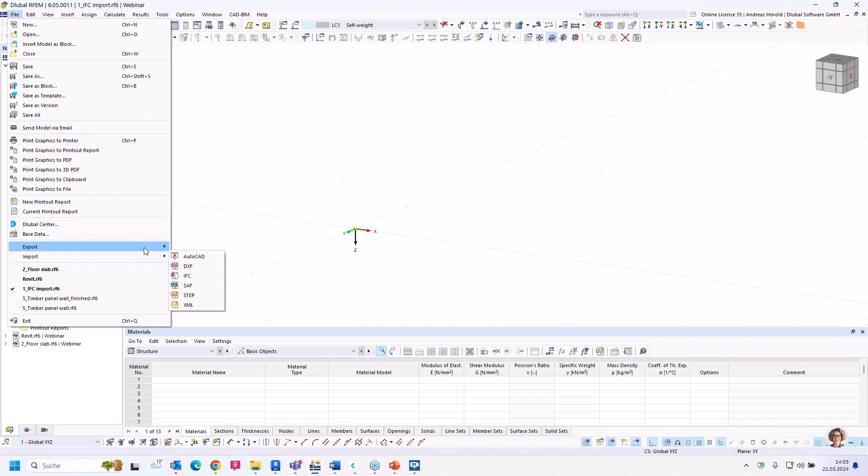You can do that via File, then Export. You can see IFC and the other interfaces, then Import, also IFC and the other interfaces. Version 4 is supported for import and export, and the older version 2x3 only works for importing. Regardless of which direction you exchange data, the structural analysis view, the reference view, and also the coordination view can be processed.

So let's import an IFC file, this file. You can choose any coordinates where you would like to import it. And then let's press OK.

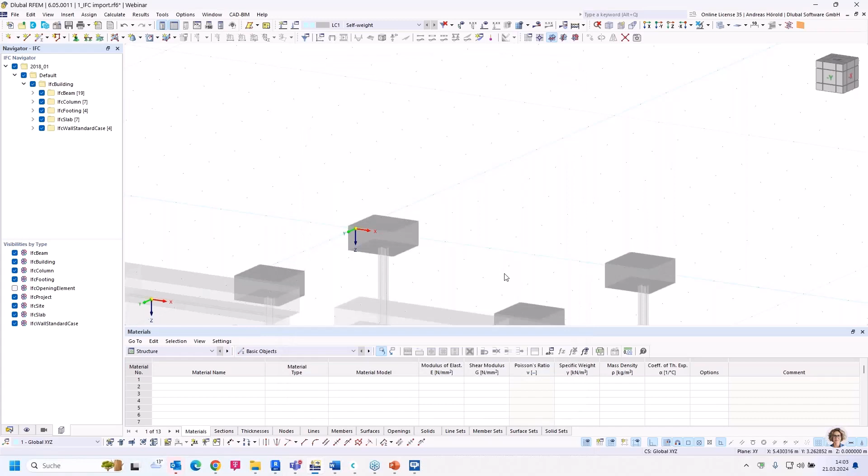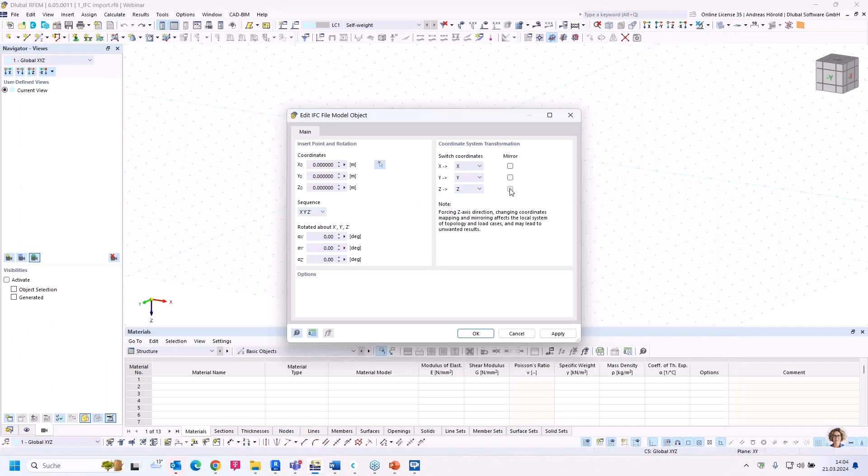You can see the import was good, but the direction of the Z-axis was opposite compared to the CAD model. That's why we do the import again: File, Import, IFC. So, and we mirror the Z-axis. Okay, that looks quite better now.

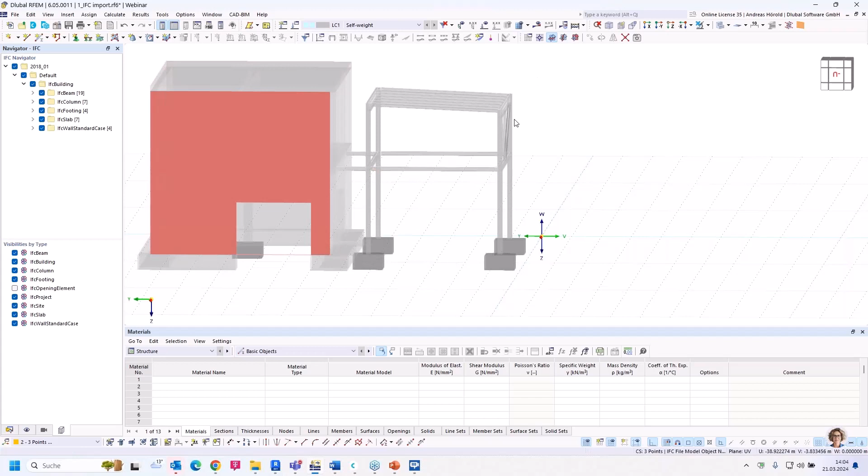Imagine we have to design the steel construction. We ignore the building here, the concrete structure, and let's prepare the model for the design. You can see at the moment it's only an IFC model object. We have to check the CAD BIM conversion tables.

The steel material has to be assigned with the material from the database in RFEM6. Also the sections, you can see the different cross sections. Most of them I already assigned, where I assigned the correct RFEM section from the library.

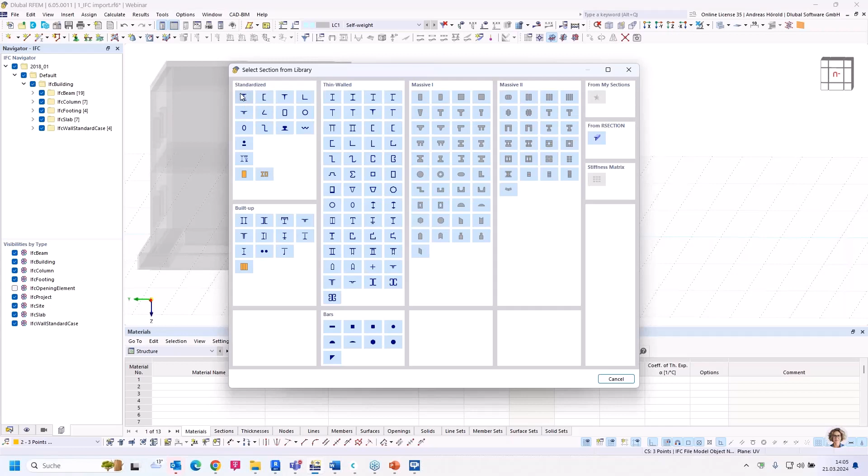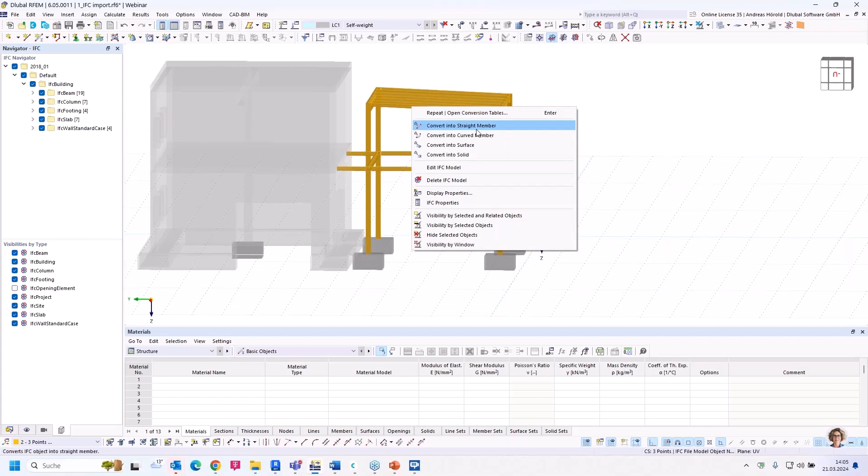So, what we have to do now is select all, and then with a right click, we convert the whole construction into straight members.

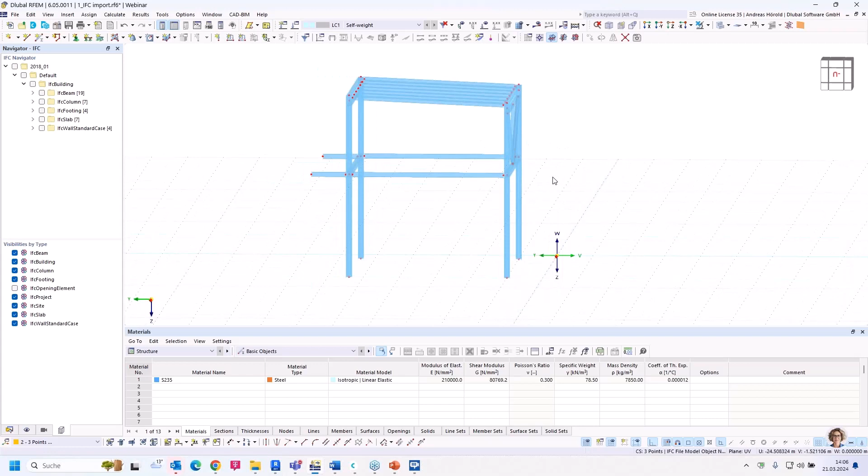Okay, let's disable the other IFC objects, here in the navigator IFC on the left side. Now there's only the steel construction. That looks quite good, but only in the transparent or solid model.

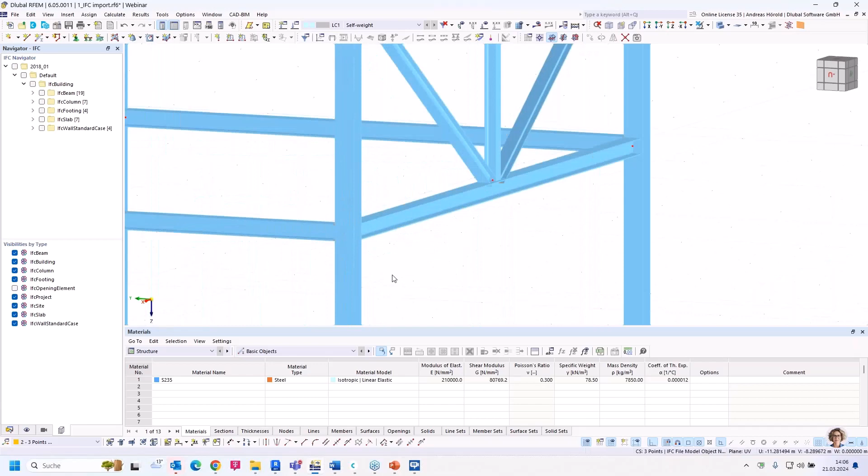But when we take a closer look in the wireframe model, you can see the members are not connected to each other. Let's turn back to the solid model. In the CAD model, the horizontal beam here is connected with the flange of the column, and so on. But we need the axis of the members, and they need to be connected.

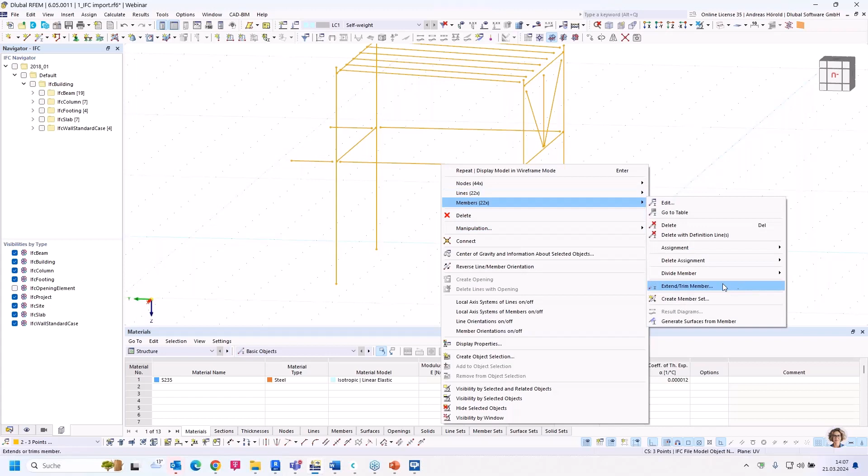So let's turn back to the wireframe model. There's a function in RFEM6 for correcting such things. I select all, and with a right click, I can modify the members with the feature Extend Trim Member. Okay, let's do that. We would like to extend them to the next member or line on both sides.

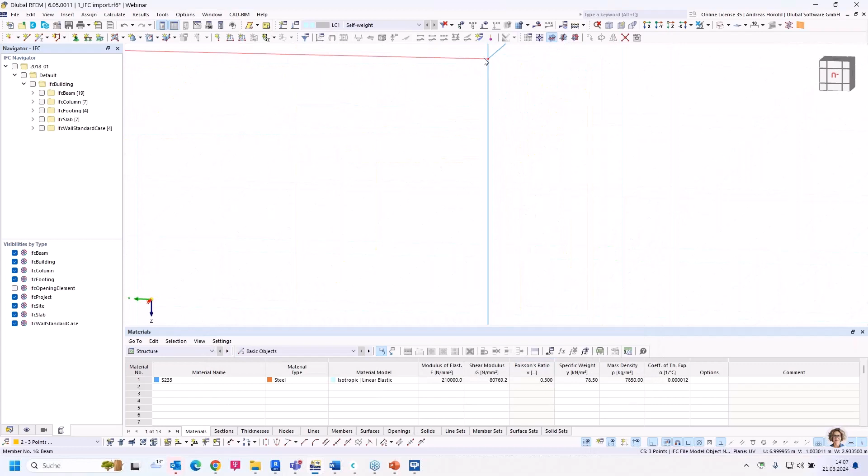Okay, that looks already quite good, at least at this node and the other nodes. But you can see the purlins are not yet connected because we have an offset, but we will correct it. In that case, also for the bracings here, we have to do that manually, for example with drag and drop. So here the same.

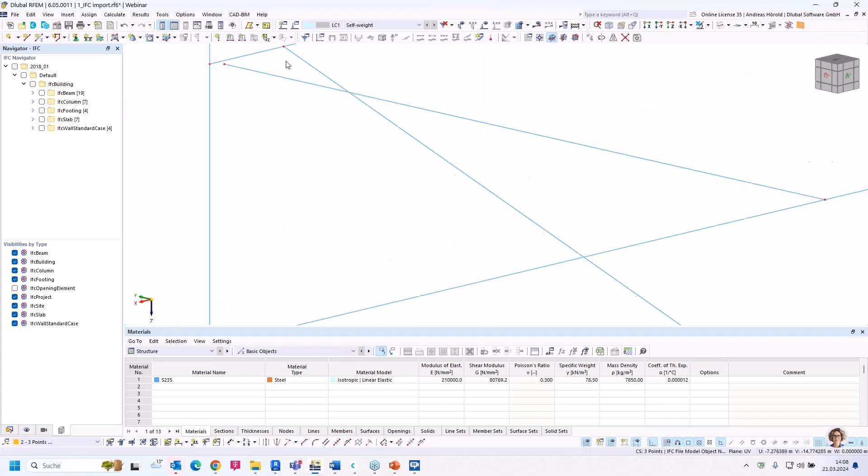Also on this side. Okay, so now we come to the purlins.

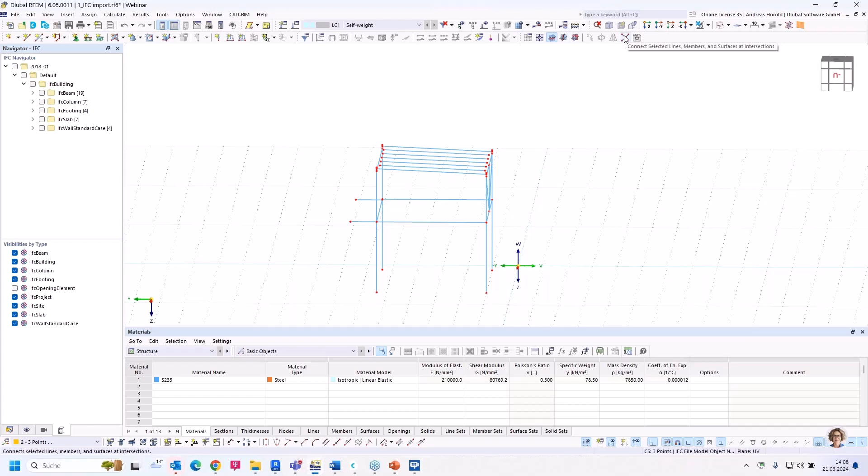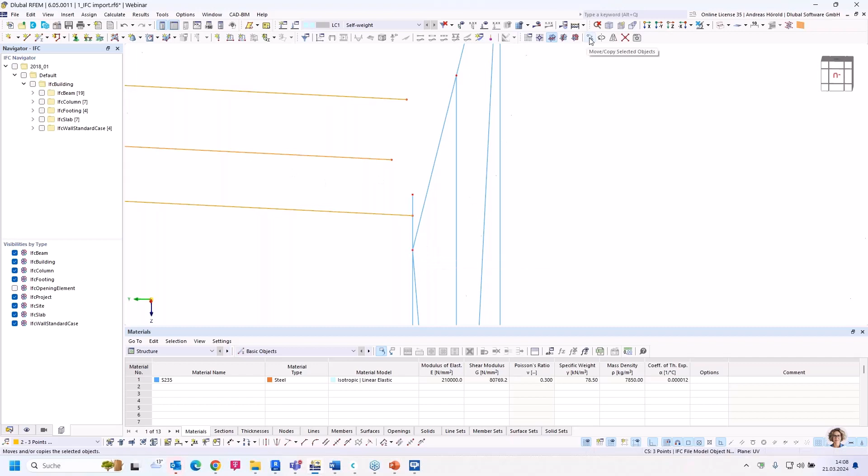I use this function that we connect the members or divide them with a node, so I can, for example, delete such a member. But in the first step, we move the roof members to this node with the move copy function, using a vector from this node to this node.

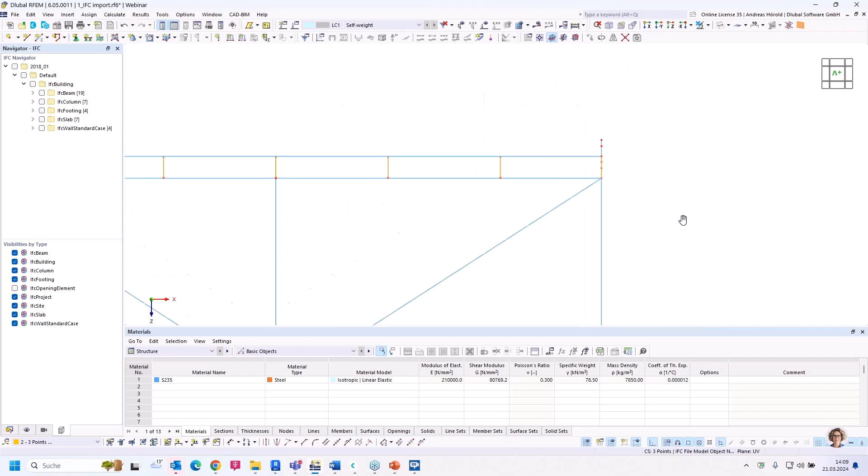So let's turn to the -y view. I delete these parts of the columns, also this one.

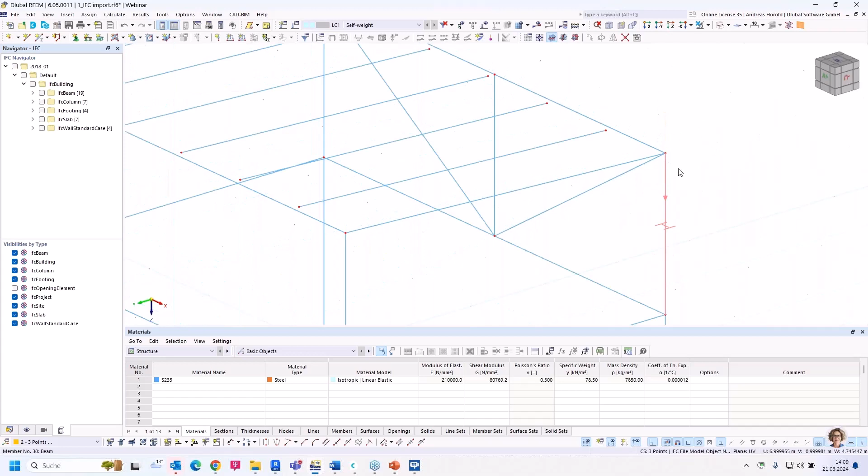So now I need to extend the purlins. I select them, then with a right click I turn to the already shown feature, extend trim member, to next member line on both sides. Okay, that looks already quite good.

In the first step, I would like to change the bracings here, with a double click for example, from beam to truss.

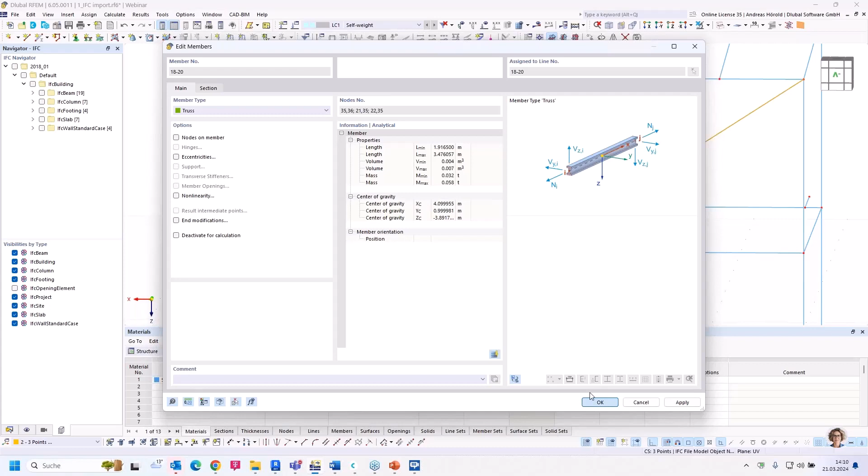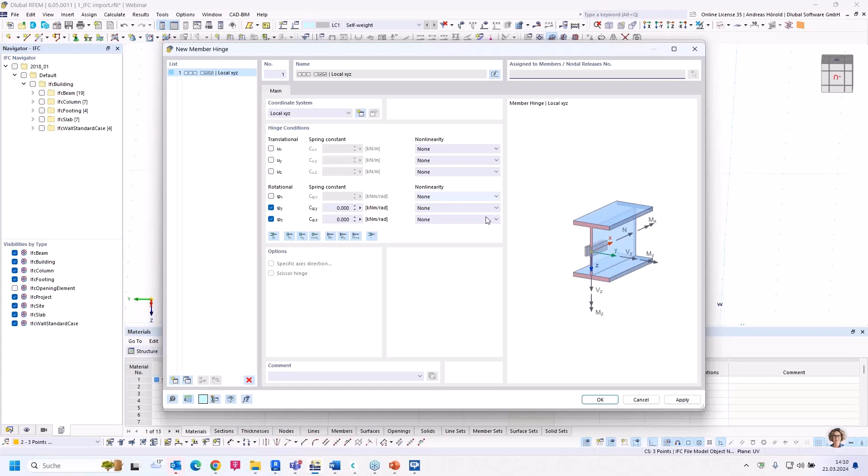So I change the purlins, or I add hinges. Double click, hinges, go to the table hinges, and create new hinges around the Y and Z axis of the member. Typical moment hinge on both sides.

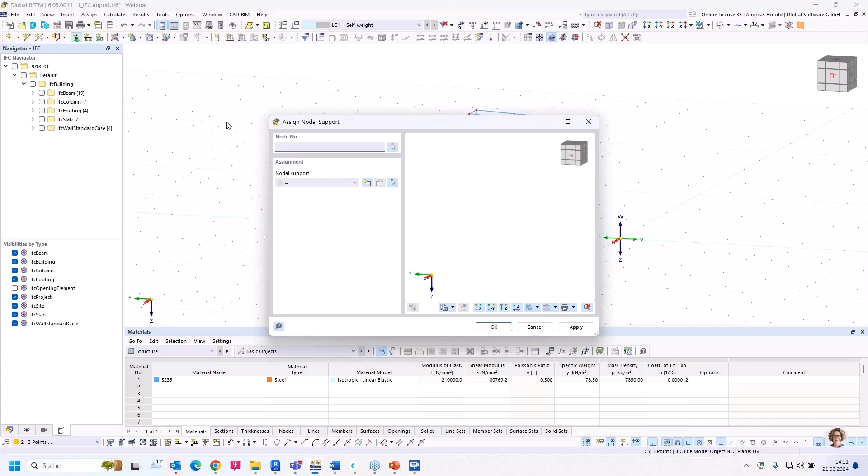Then we need to add supports. So I add supports here left above, a nodal support in all directions and around the Z axis.

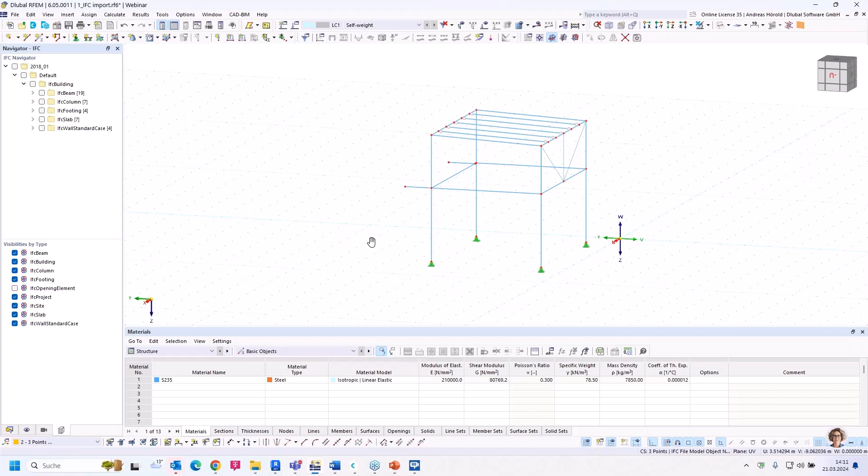And the columns are supported now. And we create also supports on the concrete wall here, a new nodal support in all directions and around the y-axis.

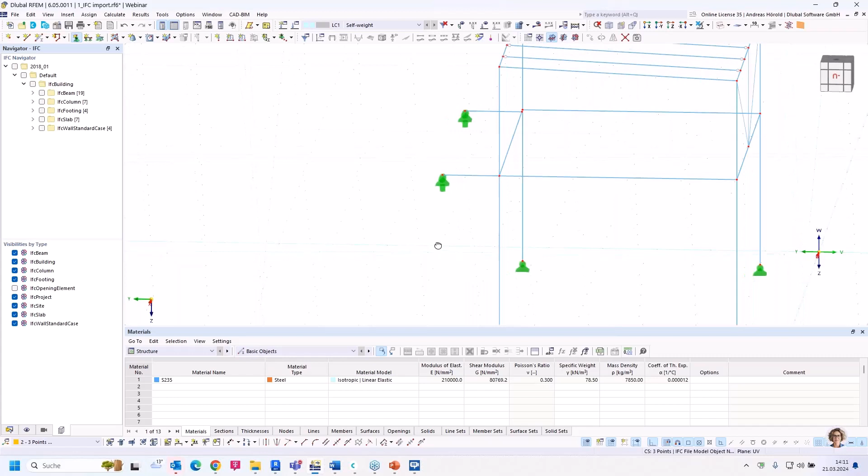Yeah, that should be all. The model is now corrected or modified. We can go to the tools and do a plausibility check. All is okay, and let's calculate the self-weight load case.

Okay, we get results. That means all is connected correctly. And the model can be, we can assign other loads, snow and so on, and wind, and calculate the structure.

Now you can see it's quite complex to modify such an imported model. It depends how good the model is created in the CAD program.

Now there are other possibilities, for example with the direct interfaces from RFEM to Tekla Structures, or to Revit, or from Revit to RFEM.

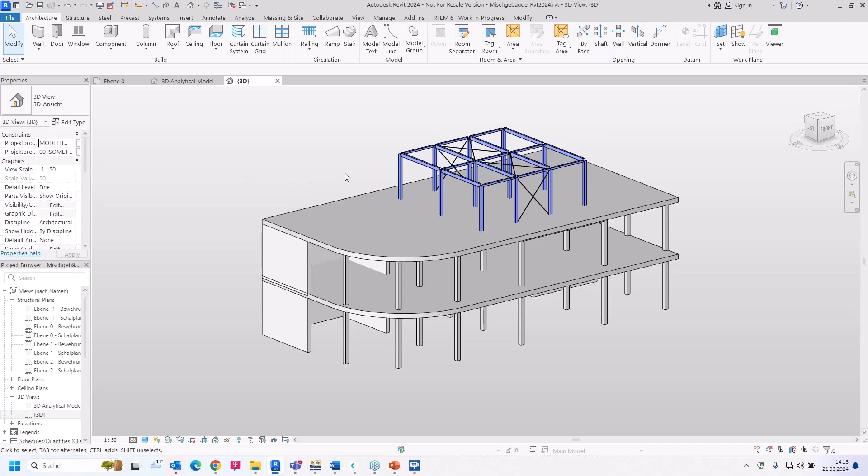Let's show that. I turn to Revit, and if you create a physical model and in parallel an analytical model, you can also create supports and so on. And if you export such a model, you don't need to modify so much as I showed for the IFC model.

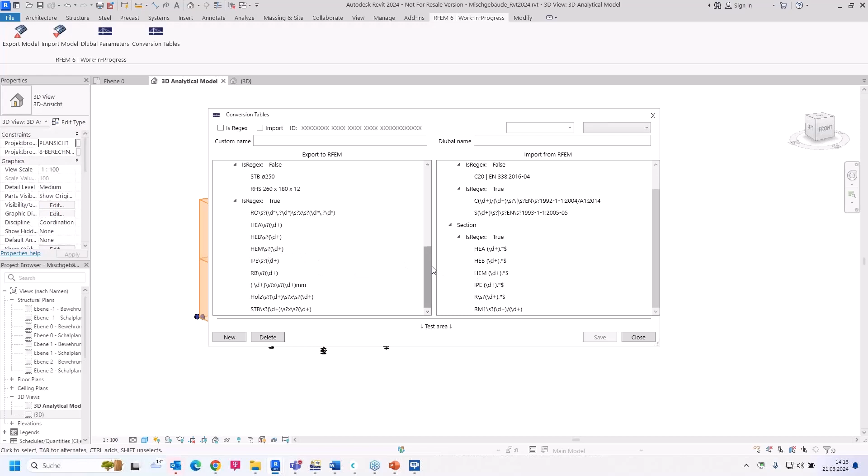Let's do that. We turn to RFEM, the RFEM table here, or dialog. There are conversion tables. You can also add different cross sections that need to be transferred, and then you can go to the export.

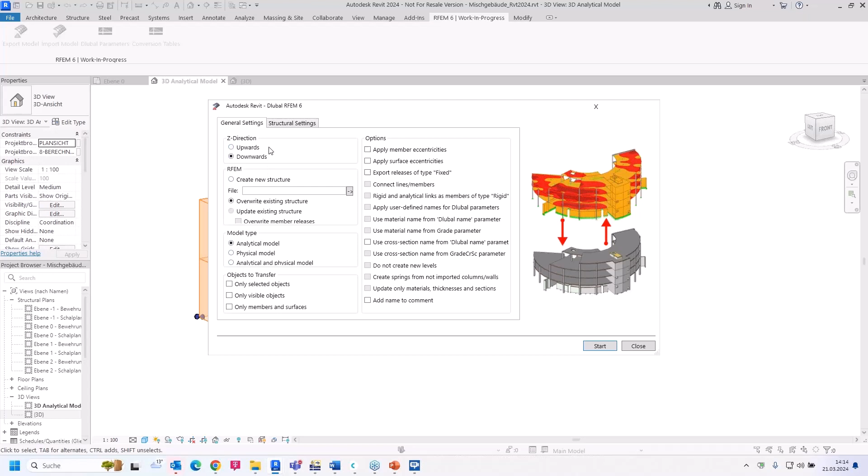You can select if the Z-direction is upwards or downwards. You can overwrite the existing structure and so on. You can transfer the analytical model, physical model. You can do structural settings. You can transfer nodal and line supports and so on.

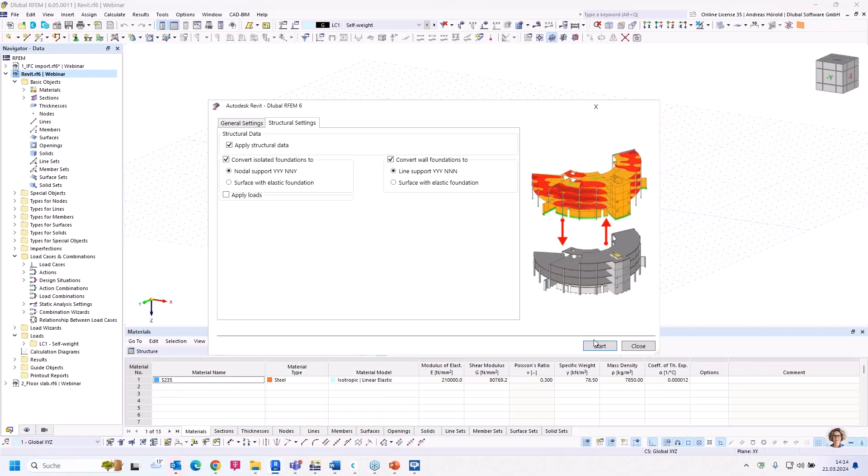I need to go back to RFEM and go to an empty model. So, now I start the transfer. Start, okay, now that takes only some seconds. We go back to RFEM.

And now you can see the transferred model. That looks quite better. We can turn to the wireframe model. All members are connected and so on.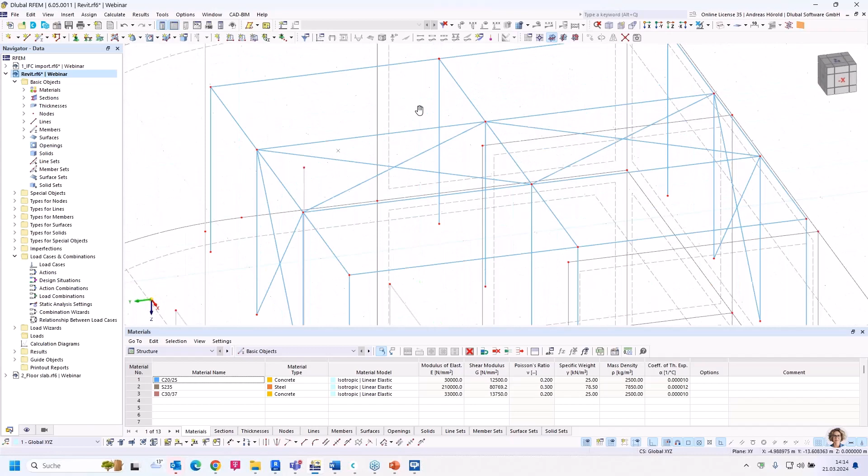So let's calculate the model. I create a static analysis setting and calculate the load case, self-weight in that case.

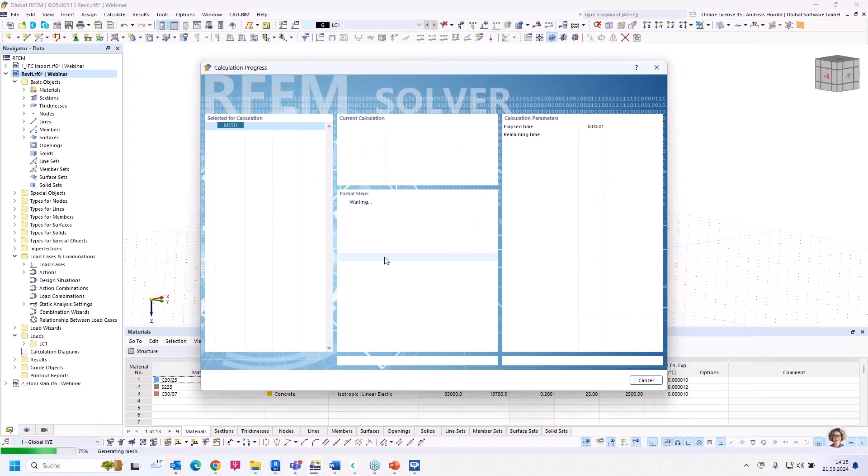So the same workflow is in Tekla. The input is analogous. And as I already said, the better the model is prepared in the CAD program, the less additional work in RFEM is necessary.

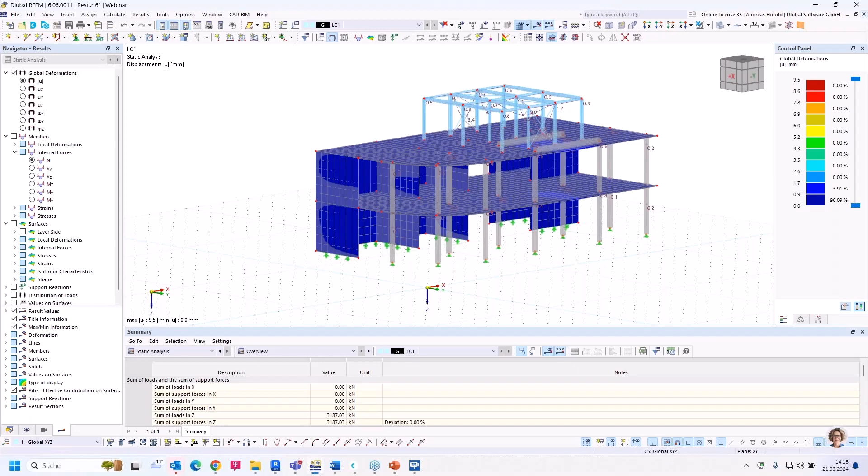Okay, so I close that model, and I save this model. And we turn to the next question.

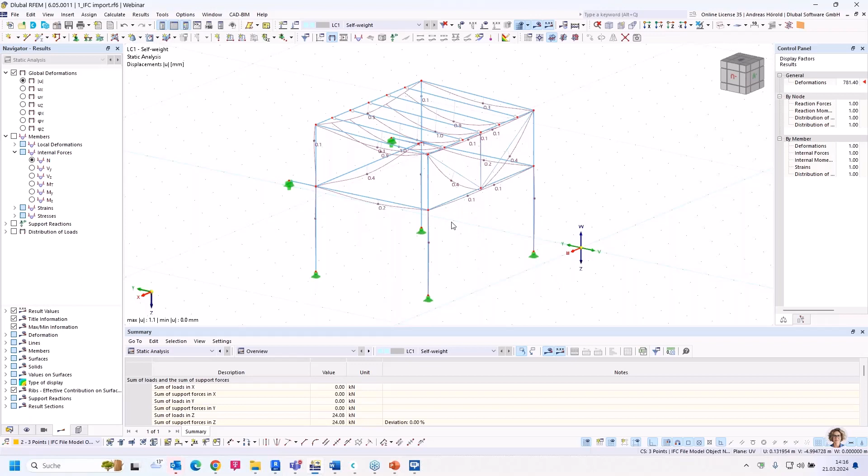The next question is, can I transfer a support load to any location in the target model without defining a node here? Yeah, that is possible. I would like to show you how to do that.

I open also the floor slab, or show both windows. We would like to transfer the support reactions to this floor slab.

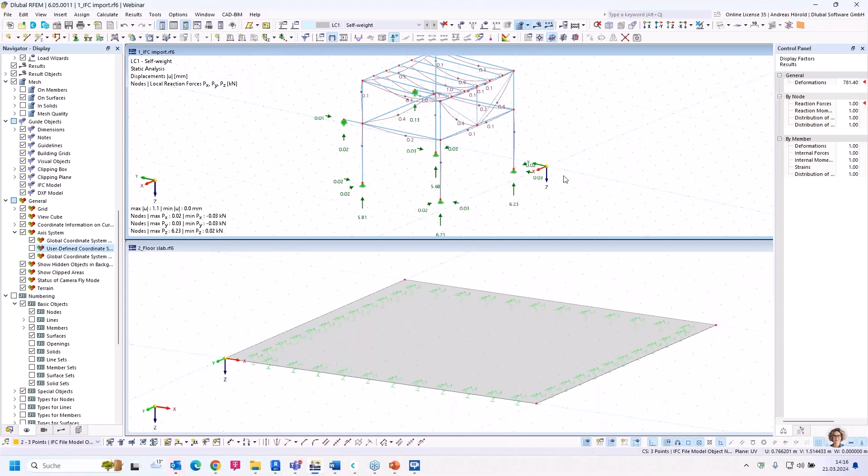Let me switch off the user-defined coordinate system from the CAD model. You can see the steel structure is in the positive Y direction and the floor slab is in the negative Y direction, but for the feature I'd like to show, that doesn't matter. Let me rotate it a little bit.

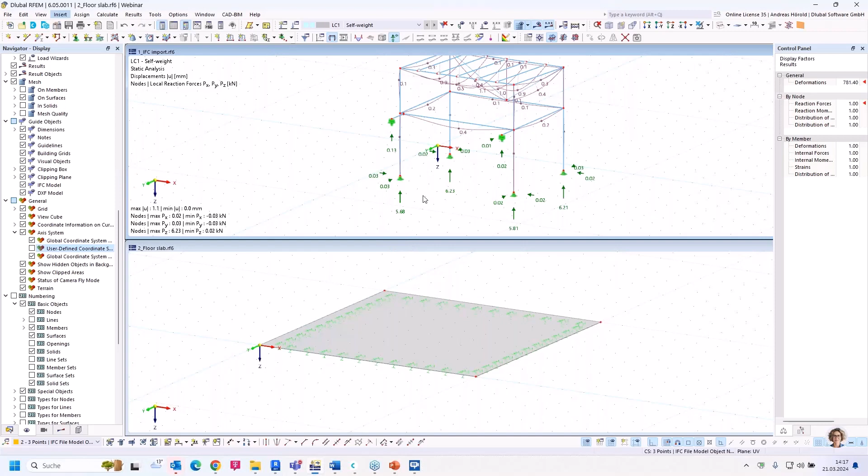We would like to transfer those 4 support reactions to any place on the floor slab. How to do that? We turn to insert, and first we would like to show the numbering of the nodes. That's quite important, and I also add dimensions in the structure.

So 5.8 meters in X direction and 4.4 meters in Y direction. Then we turn to the floor slab, insert loads, free concentrated loads.

The feature I show you will be released in a short time for free line loads as well, as I showed for the free concentrated loads. I have to select import support reaction, and with this button I define the location of the loads.

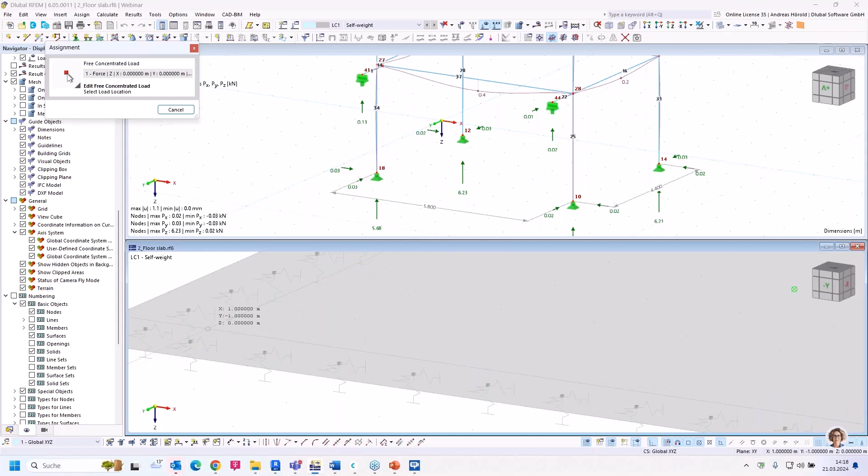So let me select the point, for example this point. I have to define the node number or select the node number. That's the model name, IFC import, and it must be in the same folder as the target model.

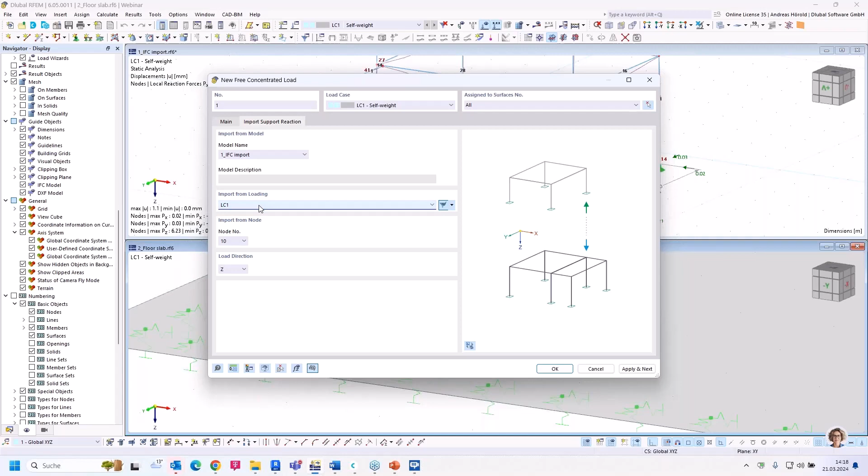So here you can select the load case and the node. That's node 10. In Z direction. Okay, that's all for one support reaction.

We need to copy that load, 5.8 meters in X direction. Copy. And then both loads in Y direction, 0 and minus 4.4.

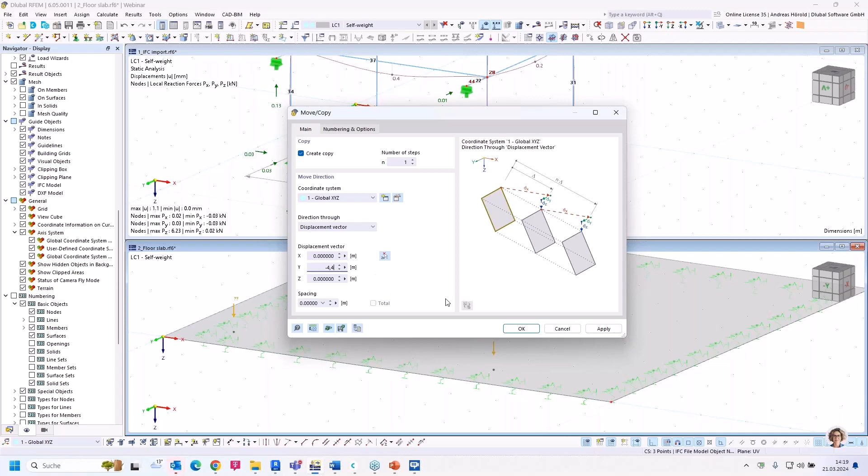So now we have to assign the nodes: node number 10 for this one, node number 14, and for this one, node number 12.

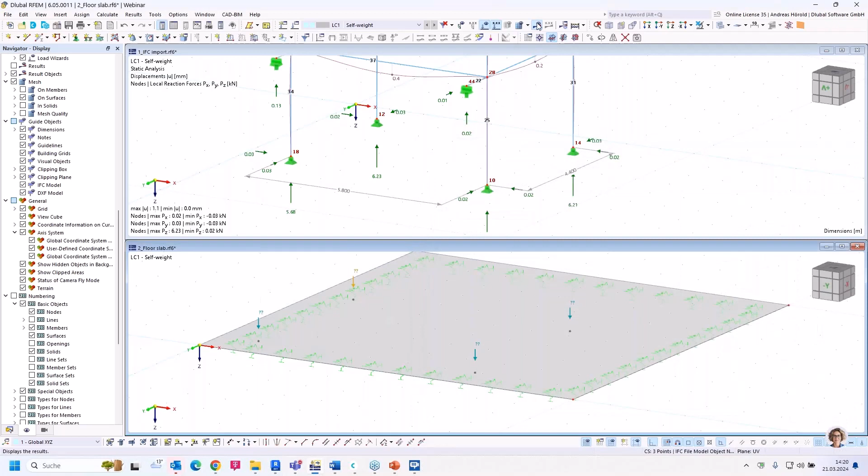So then we need to calculate the load case, and the loads were transferred from the original model to the target model. Takes some seconds.

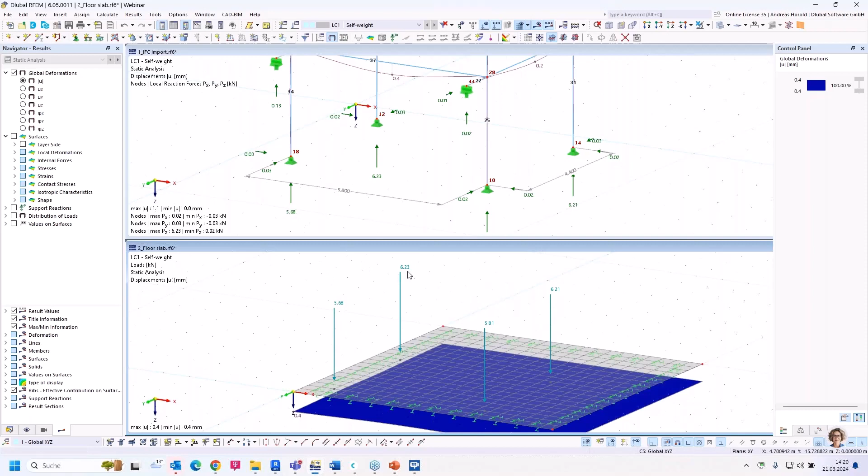Okay, so now let's compare the values: 5.68, 5.68, 6.23, and so on. It matches for all 4 loads.

That's also a little bit complex, but you are absolutely free on the locations in the target model. The other feature, which I already showed in a previous webinar, is insert load wizard, import support reactions, load wizard. With this dialog, you can transfer all supported nodes to the target model.

At the moment, you have to select the single nodes in the target model, but we will implement a feature so you don't need to select any single node. The program should detect where the different supported nodes are, and the loads from those nodes are transferred into the target model. That's our future plan to improve that feature.

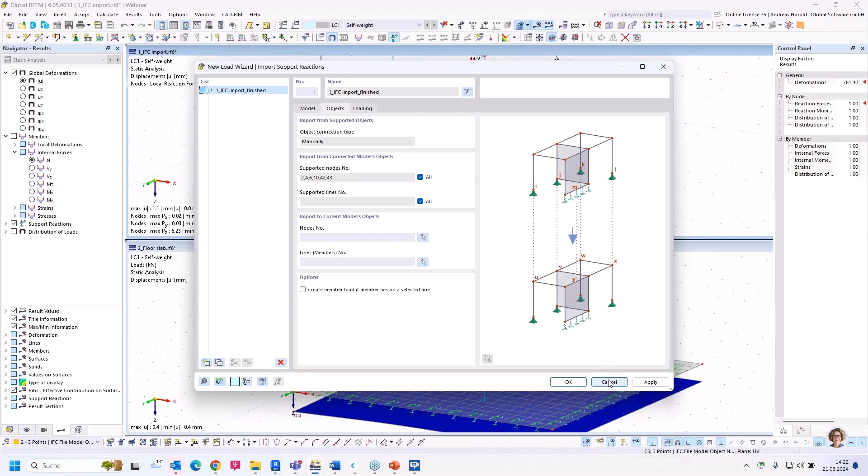Okay, then we turn to the next question. I open the next model. The next question is: are offset moments that occur when notching cross-sections considered in the design?

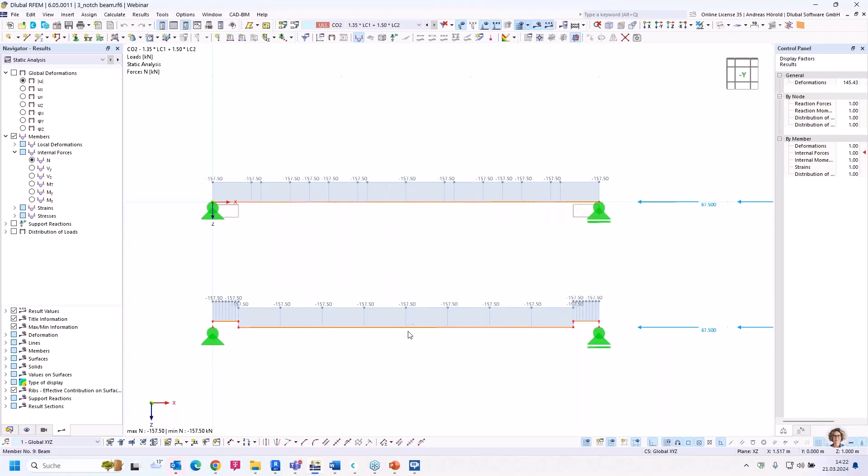Yeah, the answer is yes. I would like to show you that on an example. You can see 2 single-span beams. I turn to the solid model, and you can see notches here at the start and end point.

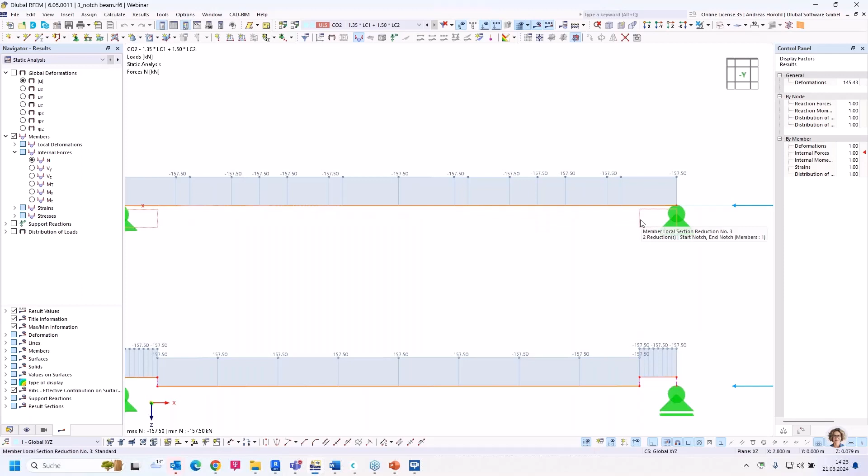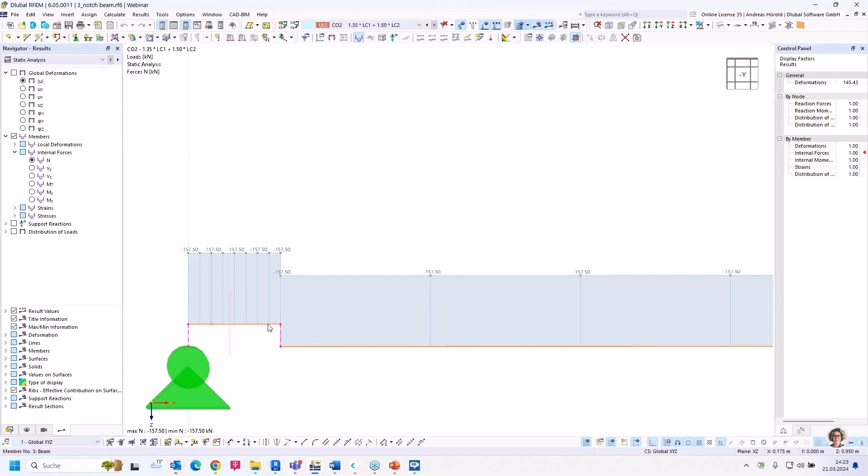For the upper model, I defined that with a design property, and for this one I created different cross sections: one with a height of 140 millimeters, and on this place 240 millimeters, that's the notch, and the axis of the member is higher than this one without a notch.

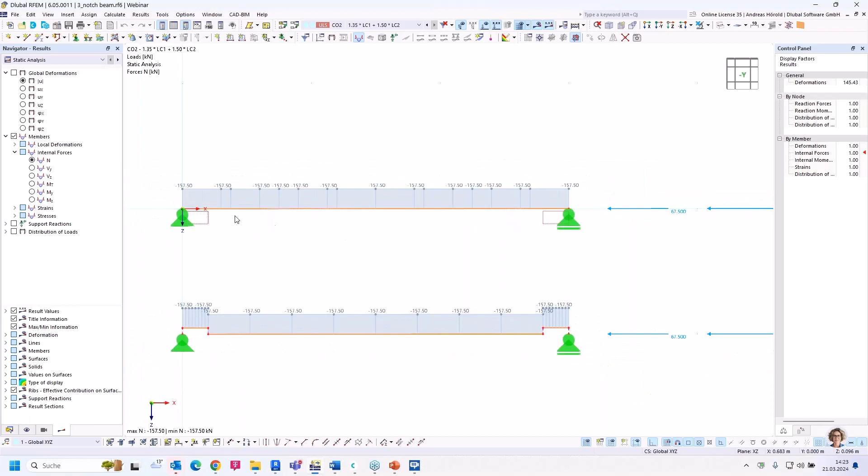You can see the internal forces are the same in both models, at least the normal forces, but for the MY internal forces, you can see there's an offset moment in this model, but not in the upper model.

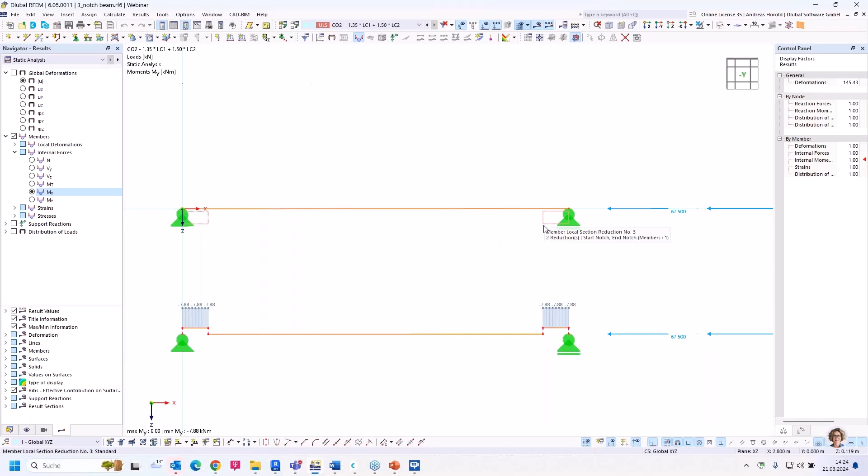But I created design properties for this member, and later this offset moment will be considered in the design. I'll show you the properties of the member with a double click. Go to the design types, and you can see where our local section reductions are created.

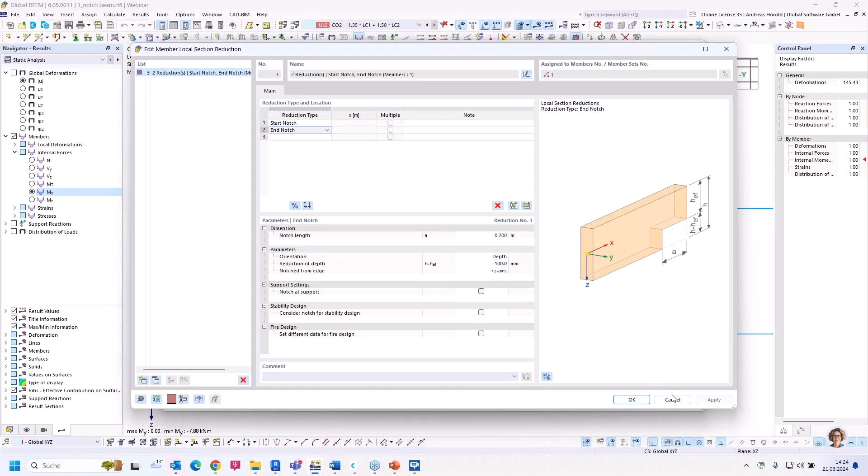So at the start, we have a notch with a length of 20 centimeters and a depth of 100 millimeters, and the same at the end of the member. I simulated the same notch with this model, using rigid members.

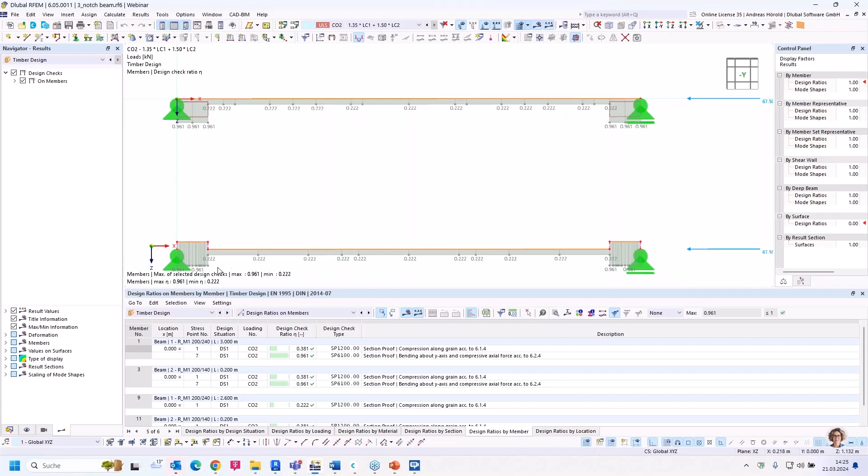Okay, let's go to the design, to the timber design. I go to the design ratio by member, and you can see all the design ratios are the same in both models.

And at the end and at the start, okay, that's member number 1. That's member 1 in the table.

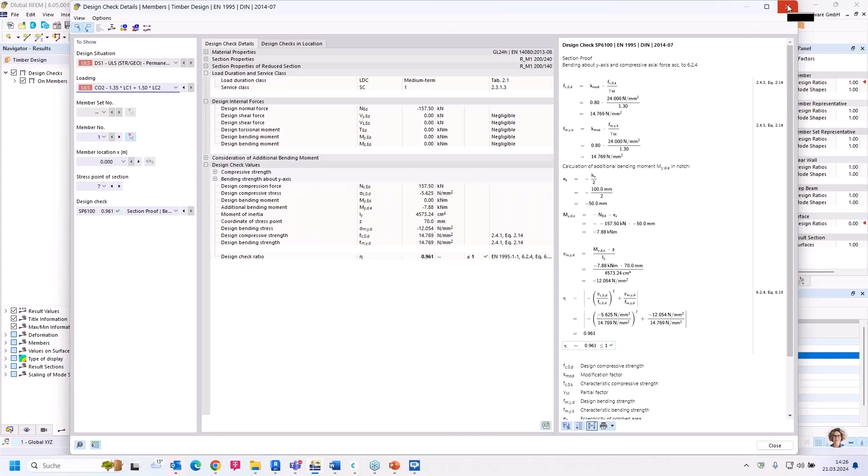I double click on that line, and you can see in the design checks, the calculation of additional bending moment is considered. The normal force with the eccentricity because of the notch, you can see that it is considered. That's the answer of the question. Yes, the offset moments were considered in the design.

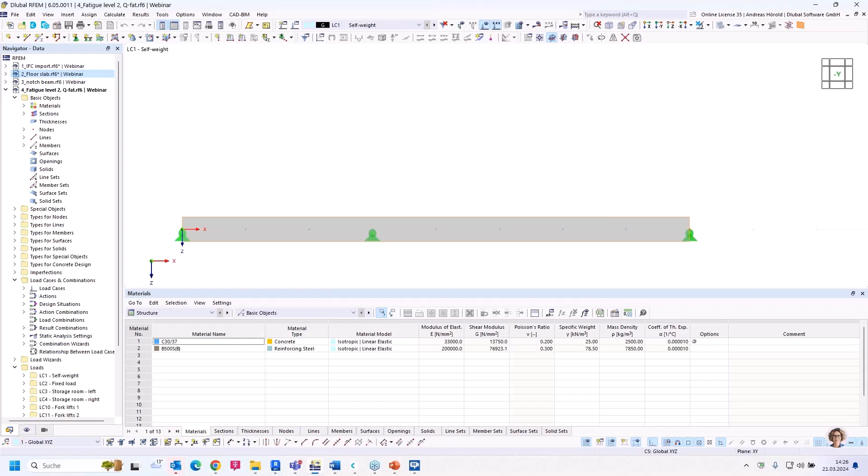Okay, then we turn to the next model and the next question. The next question is, how do I consider the Qfat value for level 2 fatigue design for concrete components? That's a simple model, a 2-field beam of concrete, different load cases: the self-weight load case, fixed load, storage room left and right, and forklifts load on different places. We simulated such a moved load. So let's turn to the load case and combinations.

So where we created result combinations, then the load cases, and for the forklifts, I selected in the additional settings, consider as fatigue load for all forklifts load and not for the others. So the fatigue effect is generated in the actions as soon as a load case has been given the option. You can see the fatigue action.

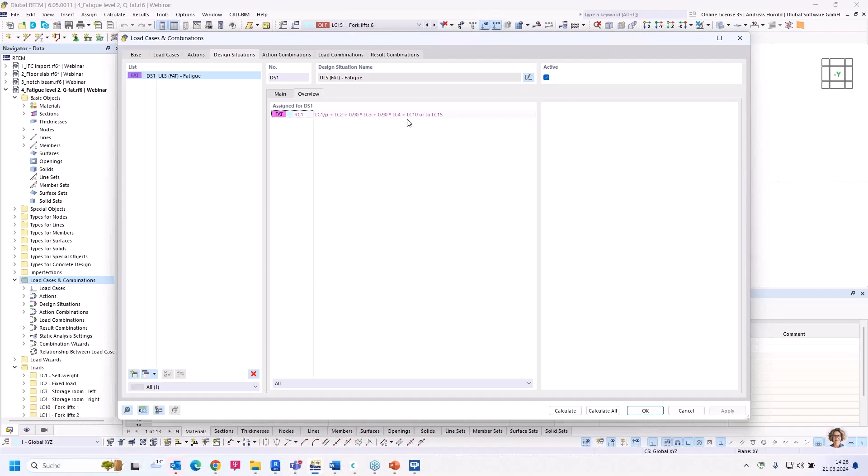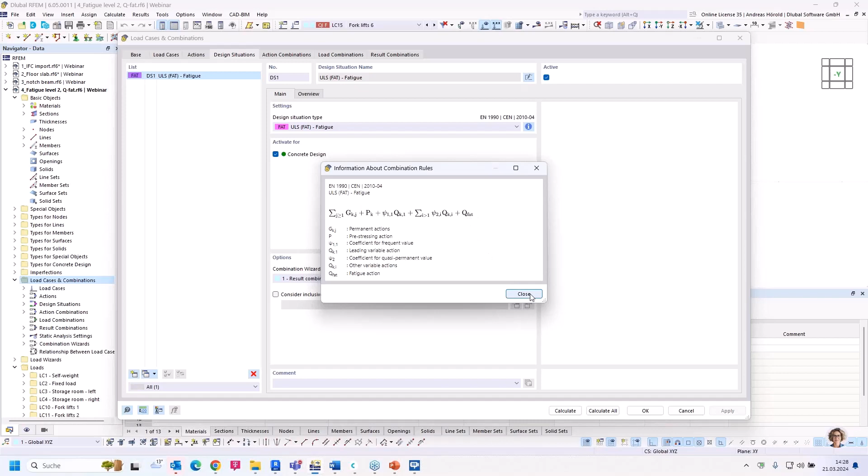So then let's turn to the design situations. We have got one design situation, ultimate limit state FAT, fatigue. Okay, and the result combination is selected. At the moment, it only works via result combinations. You can see the forklifts load case 10, or to load case 15. And if we click on the info button, you can see the fatigue loads are considered 1 time. Okay, that's all to this question.

The next question is, what is the purpose of the artificial intelligent assistant MIA in the program interfaces of RFEM and RSTAB? You can see on the right side at the bottom, the MIA. If I click on it, I can enter a question here. The reason is 24/7 help with the program for you, so that you can ask MIA anytime, in the evening, in the early morning, or at the weekend, and so on, that you get help anytime. You can move the MIA in any direction or to another screen.

You can also switch off the enter dialog here with that button. Let's enter a question here, a typical question: what can I do if RFEM reports an instability in the structure during the calculation? When you enter such a question, it will be connected to the website, and MIA searches on the Dlubal website, in the FAQs, or in the product features, or the knowledge base library for an answer, and gives you the answer, for example, for this question. And you can do that, as I already mentioned, anytime. Okay, that should be all for this question.

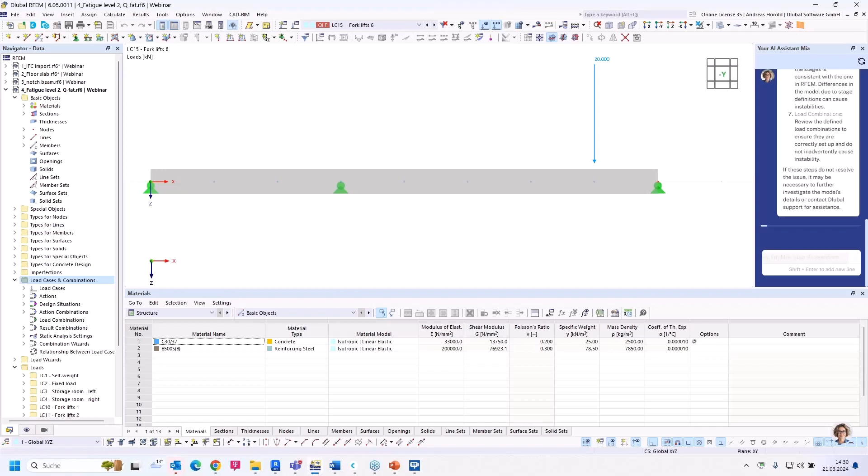I turn to the last question for today. And the question is, can timber panel walls be created in RFEM? That's an often asked question. Let me switch off the Mia. Yeah, and that's a quite new feature. And then the answer is now yes, we can create timber panel walls. I would like to show you how to do that.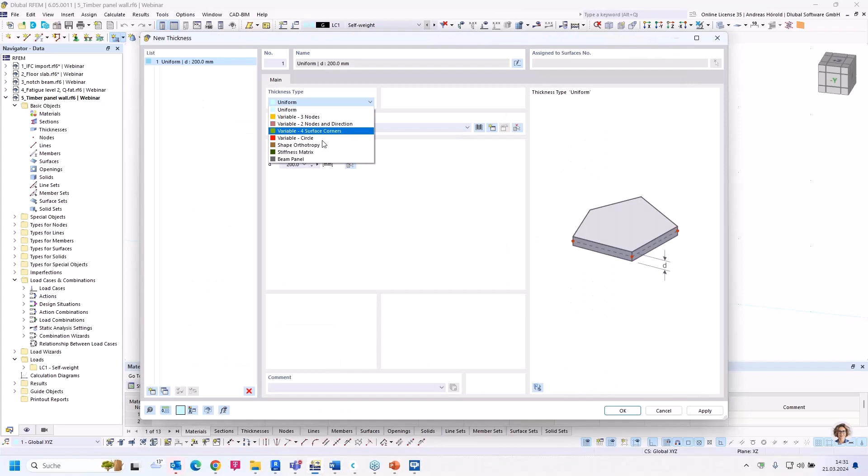I create a new rectangular surface and I have to create a new thickness. The new thickness type is beam panel. With that beam panel, you can create a timber panel wall, for example. You can see that in the preview. Let's fill out the different dialogues.

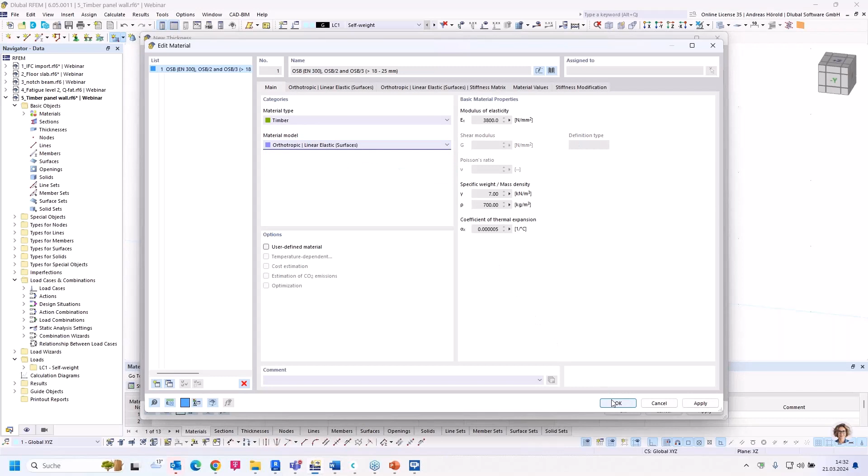We have to select the material. I turn to the library, timber, then an OSB sheet with a thickness of 18 to 25 millimeters. My sheet should have got a depth or thickness of 19 millimeters. But we have to select another material model, an orthotropic linear elastic material model. Let's enter the thickness, 19 millimeters. For the sheeting on the back side, the same sheet, an OSB sheet with a thickness of 19 millimeters.

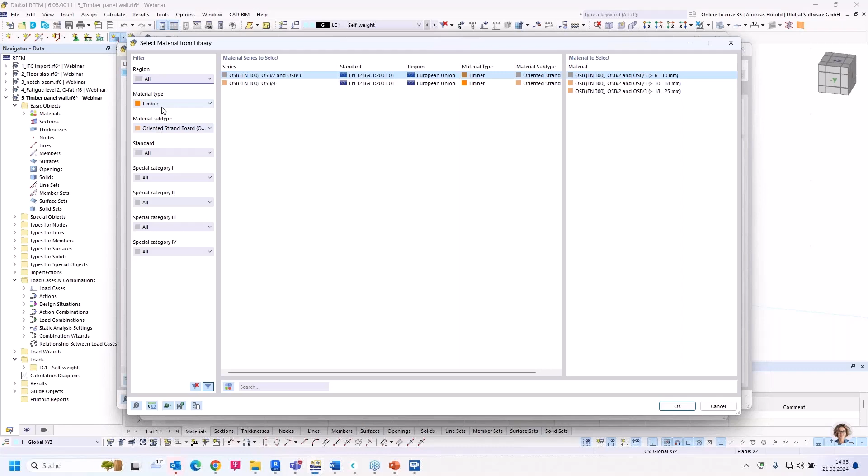Then the framing members, the horizontal members and the vertical members at the outside here. For the section, we have to define a section, a massive section with, of course, another material, not OSB, but timber and solid timber. I choose Eurocode and then softwood C24.

Okay, I have to enter the parameters: 60 millimeters and a height of 180 millimeters.

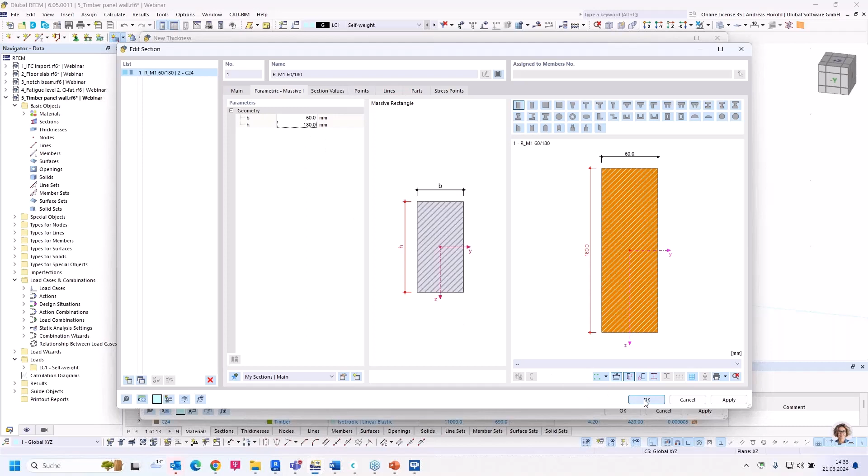Then you have to select the connection type: nail, staple, or user-defined. In my example, I choose nail. Then I enter the connector dimension, 6 millimeters, and a spacing of 100 millimeters. The connector stiffness is calculated automatically.

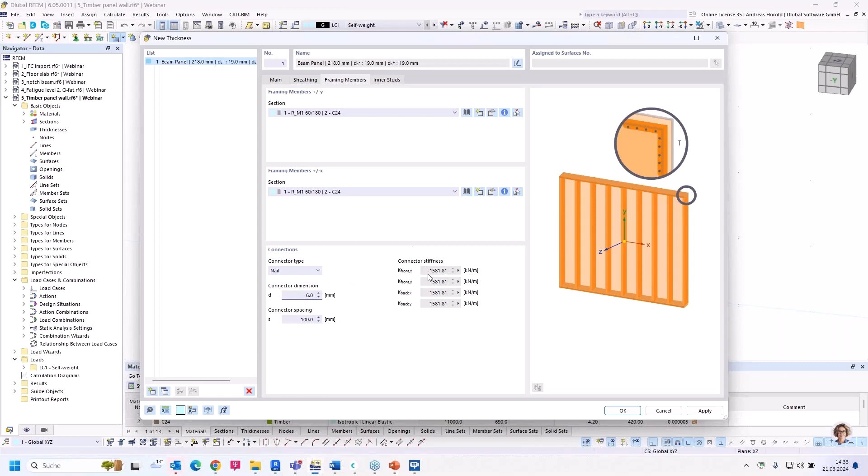Let's turn to the last dialog here, the inner studs. I choose the same section, 60 by 180 millimeters. The distribution should be entered as center to center, gap, uniform, or user defined. I think center to center is the most common entry. I have to select the spacing. A typical spacing of the OSB sheets is 62.5 centimeters.

Then also I have to choose the connector type, also nail in that case, 6 millimeters and a spacing of 100 millimeters. Okay, that's all.

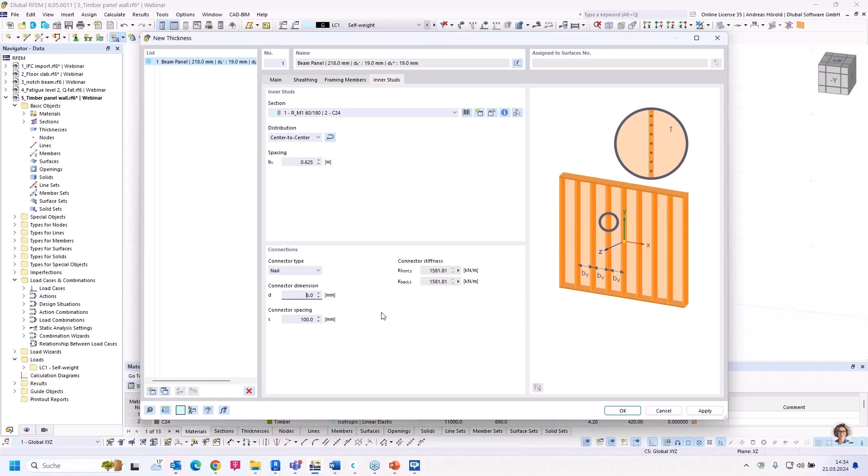I have to select the dimensions, for example 5 meters width and a height of 3 meters. And you can see the wall.

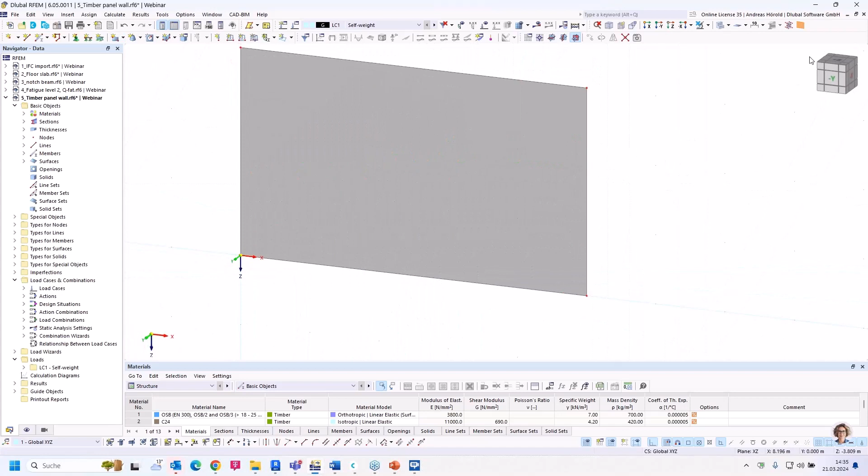With that button right above, you can display the beam panel. Now you can see the submodel. You can see the sheets on the outside, then the beams with hinges, but it's quite stiff in the direction of the wall. Let's check that.

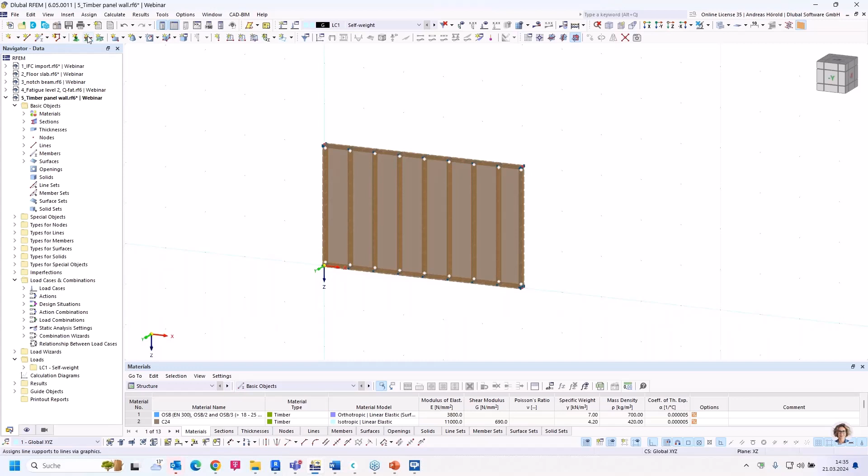I enter, left above here, line supports. I select the line. Then line support: create a new line support in all directions.

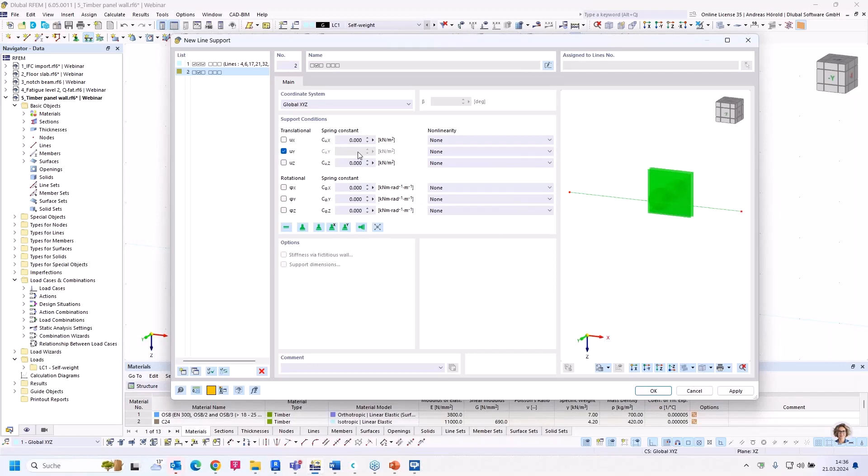And for the upper lines, I select another line support, a new line support only in Y direction, so that the wall doesn't fall down to one side, for example. And I select these lines.

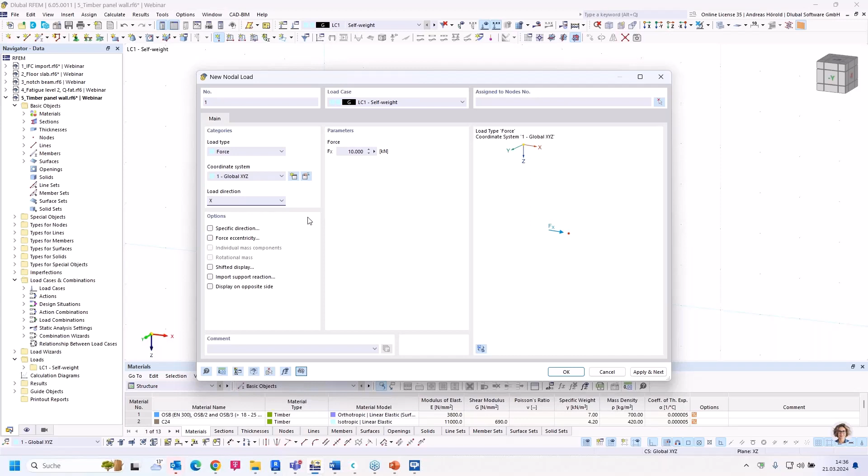So then I enter a load, a new nodal load, for example 10 kilonewton in X direction, in that node. And let's calculate.

Let's check the deformations: 0.4 millimeters. I can see that it's a quite stiff construction.

Okay, that should be all for today's questions, or the questions that our customers asked the last time.

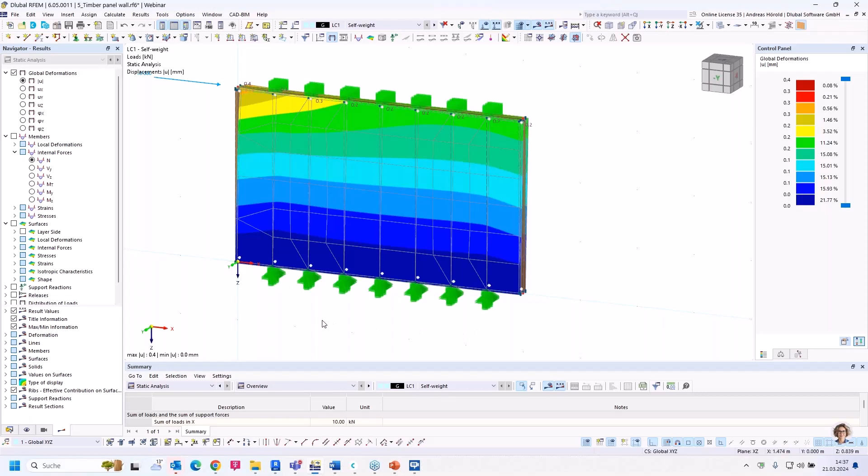I would like to show you where you can find the recording of this webinar and the models. We uploaded the models there. But before I do that, I would like to go back to the PowerPoint.